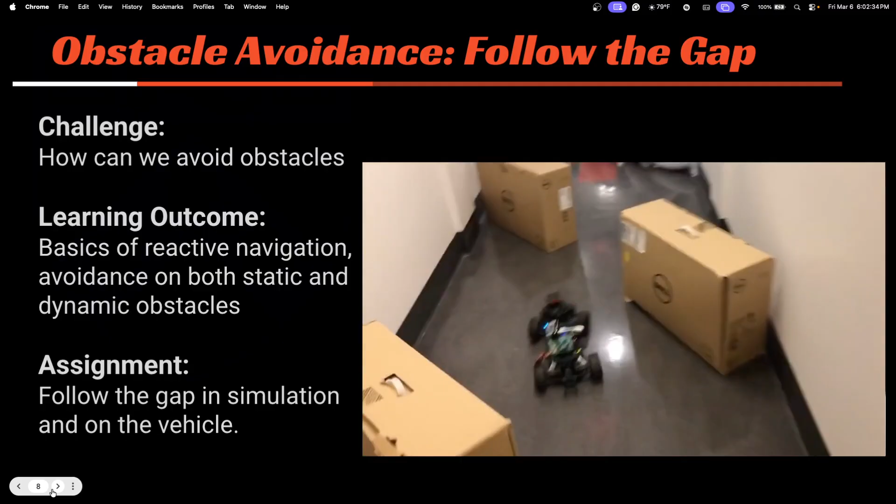And this would be like what it would look like if you implement that technique on the physical vehicle, right? And then it's kind of like going along and avoiding those obstacles. So how does it actually work, right?

So you have your vehicle, and we're using lidar for the vehicle, right? What the lidar gives you as the sensor, it just outputs an array of numbers, and those numbers are pretty much how far away you have something at that particular angle. The angle will depend on the range of the lidar, right? It would probably start at, let's say, an example is it starts from 0 to 180 degrees.

So the first one would be, okay, so at 0 degree, so which would be like, if we're using this position and this is 0, at 0 degree you have something that's 0.5 meters away from you, and then at 10 degrees you have something that's 5.1 meters away, and then you continue. Those numbers are pretty much describing what the lidar is seeing, and you would use those numbers to try to find a gap and try to steer the vehicle in between those gaps, right?

So if, and of course, when you see infinity, it means that the lidar has a range, right? Ours has a 10 meters range. So if an obstacle or something is above that 10 meters, we will say it's infinity, because the light never returned, so it couldn't really calculate how far away. So keep that in mind when you see ranges like that.

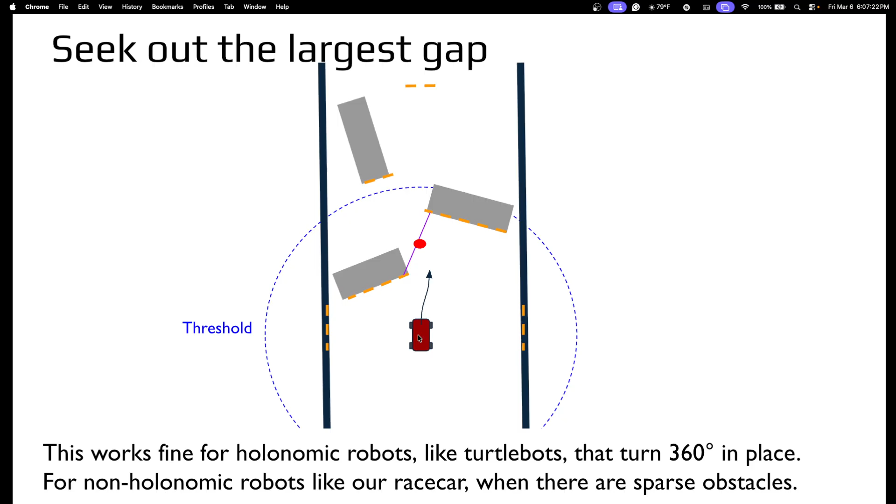So the vehicle itself, it's not something that can just, it has to obey the laws of physics, and the way it moves is through wheels. You can't just be like, hey vehicle, just go straight there. If you just go straight there, the side of the vehicle will hit here. Even though sure, you found the widest gap, and you are steering the vehicle toward the middle of that wide gap, but if you don't take into account the physics of the vehicle, then you will still hit obstacles in your algorithm. So what you would need to do is move a little bit to the side, and go toward the middle.

So the reason we have to do that - let's not go too deep into that - is because there's two types of robot, right? There's holonomic robot and non-holonomic robot. A robot that cannot move however it wants is like a non-holonomic robot.

So if you have a vehicle, like a car, let's say you're in car number one and parked in a spot, and you're in car number two and you want to go to that open spot, you can't just make the car go sideways. You'd have to make the car go back and then steer over there so it can get there. That's background knowledge to keep in mind when it comes to steering a vehicle to do something - we don't have four wheel steering like this car.

So even though we have that technique to just find the widest gap, we still need to do a few things, a few tweaks, so that our algorithm can work.

One of those tweaks would be to create a bubble around the vehicle itself and around the obstacles themselves. So what you need to do is, okay, this is the nearest obstacle - instead of just finding the largest gap and steering there, you take into account the nearest obstacles. You put a bubble radius in front of it, and then you adjust your vehicle, or program it, so that it tries to avoid the nearest obstacle when you take into account the bubble.

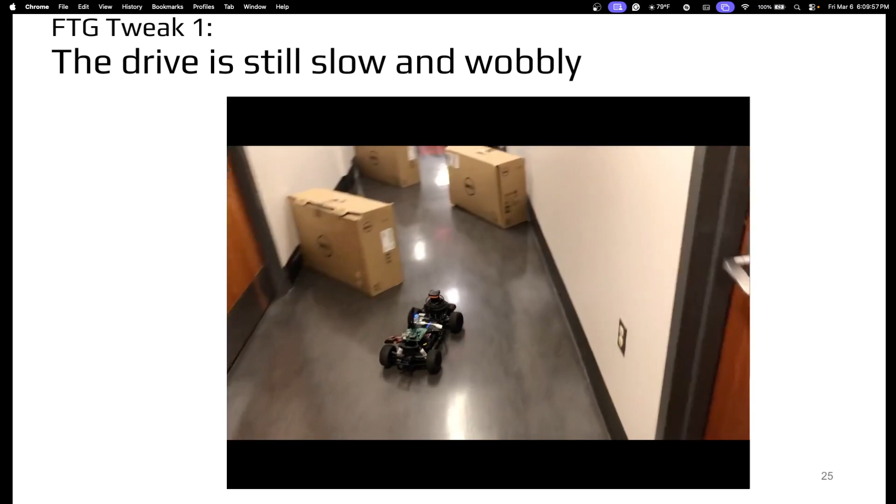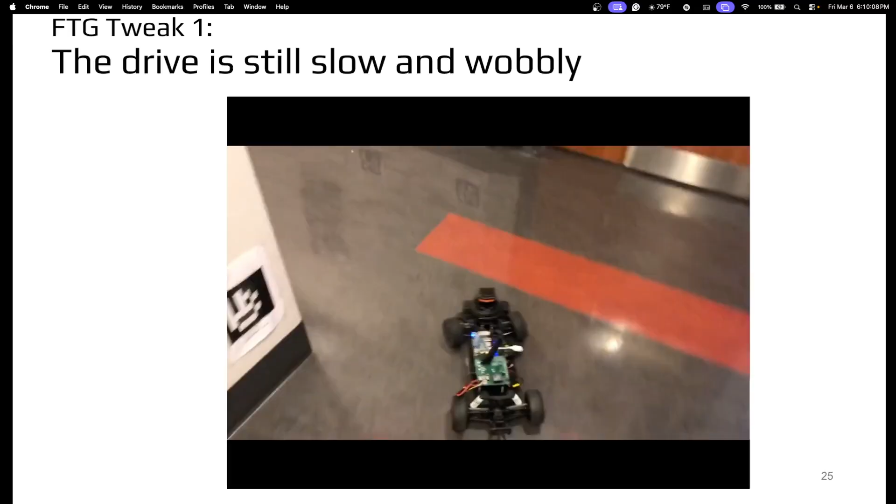So this is also an example of the vehicle following the gap, using the follow the gap method. Another thing is that if you're just using that method, when you get to a point where it's a straight corridor or a straight path, you will see that the vehicle will wobble a little bit, and I'll explain why it does that.

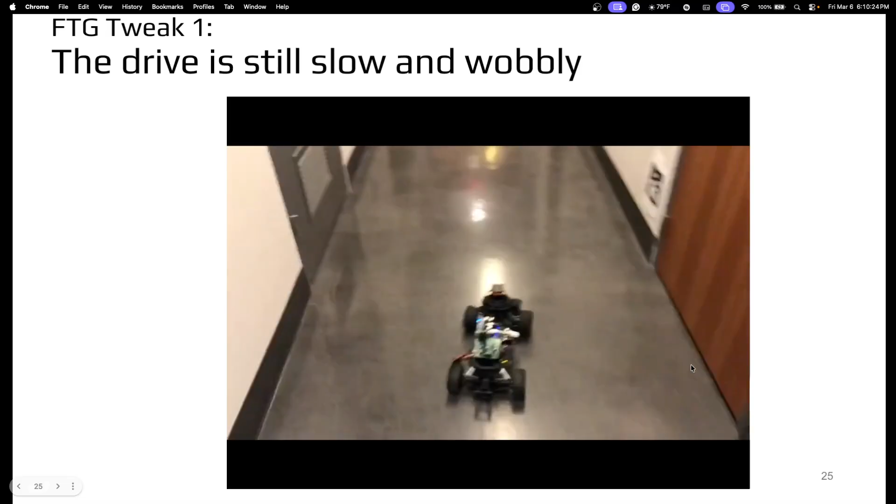Like right here, it's a straight path, but it's still wobbling. The reason it's doing that is - let me see - there's a few reasons why.

So instead of just trying to follow the biggest gap, you can also take into account, in all of these big gaps, what is the furthest point where the vehicle can safely go through. You make it do that, and of course you will need to also take into account using the safety bubble method I mentioned before, to make sure that the side of the vehicle does not hit the wall. Because of that, the vehicle would need to steer over there, because that's the furthest point it can go safely through.

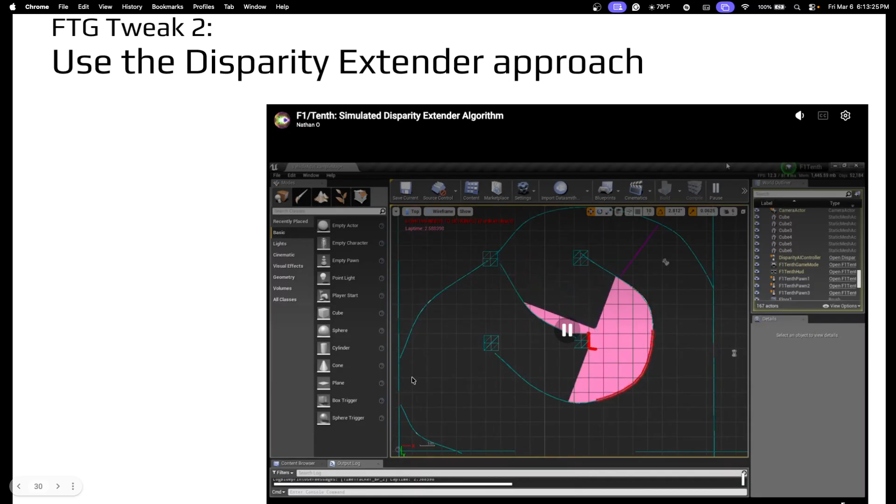So this is an example of follow the gap, and not just straight follow the gap. They did some improvement with the disparity extender, which is the technique I mentioned before. Sure, there's a big gap, but where's the furthest point we can go toward that big gap without hitting anything else? That's why it's able to move a bit smoother, and this is what the lidar is actually seeing in the race itself.

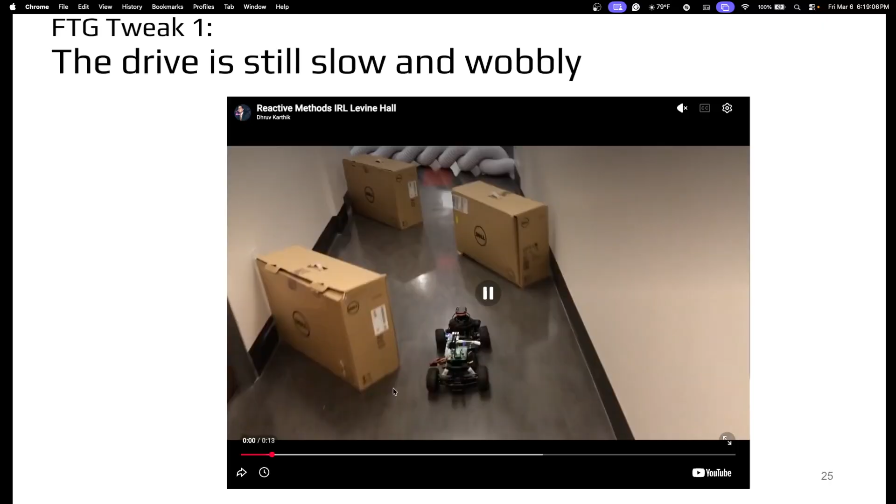And then it goes right here, and it just keeps oscillating. So that's why in that video before, you saw the vehicle was oscillating. Let me see if I can find the video real quick. Right, even though it's a straight space, it was still wobbly. So it was because of that.

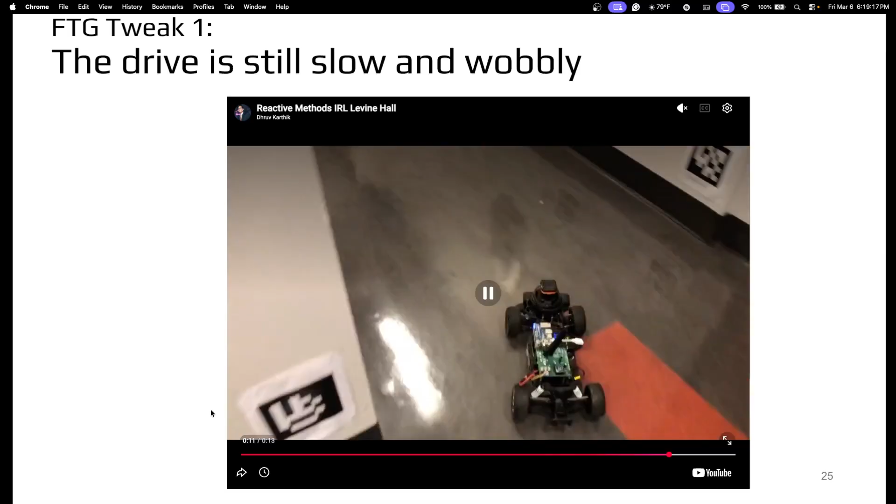Overall, those are the main things to keep in mind when you are implementing the follow the gap technique, and how you should actually do it. Overall, follow the gap can be pretty...